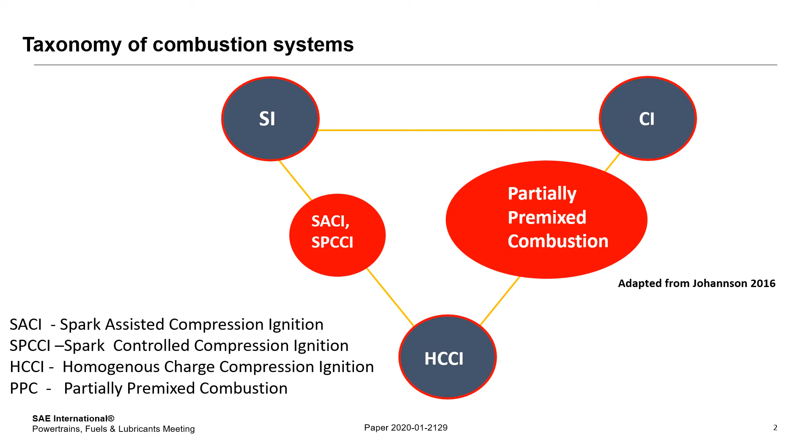If we look at what fuels we might want for partially premixed combustion, there are essentially a number of criteria that we might wish to apply. The first one is obviously whether it'll work in a PPC engine. The second one, which I think is often overlooked, is the availability of that fuel. Because if a fuel is not already available, you end up with a so-called chicken and egg problem, that there might be a reluctance to stock a fuel for which there's no demand, and there might be a reluctance for automotive manufacturers to manufacture vehicles which require a fuel which isn't easily available.

The third criterion is looking at the diesel-gasoline demand ratio in European refineries. Currently, European refineries tend to be long on gasoline and short on diesel. And so anything that encourages the demand for gasoline is deemed to be useful.

So if we evaluate possible fuels for partially premixed combustion against these criteria, first of all, if we look at diesel, yes, it'll certainly work in PPC engines, and it's clearly already available at retail stations, but what it won't do is to rebalance the diesel-gasoline demand ratio. It'll send it in completely the wrong direction.

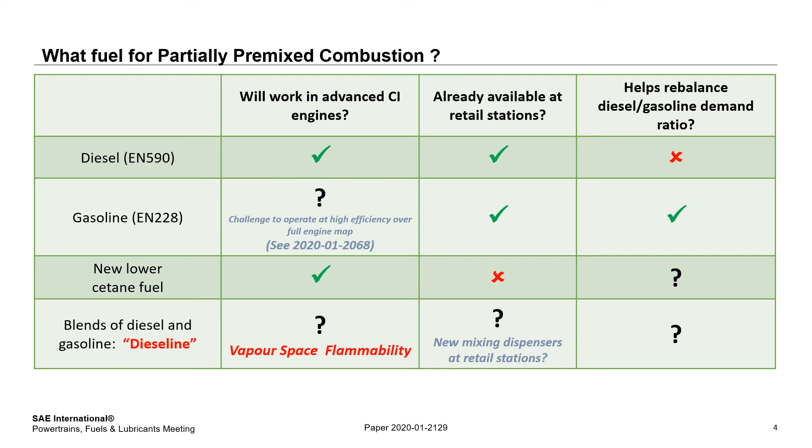Fuel vapor pressure is a function of fuel volatility and ambient temperature. If you look at the extreme examples of diesel and gasoline, diesel, being not very volatile at all, tends to have a headspace that is too lean to burn, whereas by contrast, gasoline, being much more volatile, tends to have a headspace that is too rich to burn.

Now, if you add small amounts of gasoline to diesel, of the order of 1% or less, it's known that that can result in a flammable headspace. And I think many of you will be familiar with the concept of diesel flash point. So adding gasoline to diesel will dramatically reduce the flash point. So really, for a practical gasoline diesel mixture to not be flammable, you generally have to exceed the rich limit. And so that's what we'll be focusing on for the rest of this presentation.

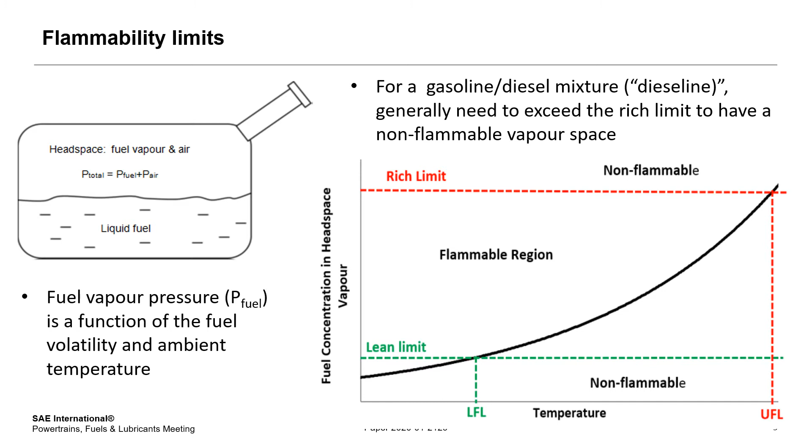So this is the fourth of 4 papers of previous work between Concawe and NEXUM looking at the topic of dieseline flammability. In the first paper, we presented experimental measurements of flammability using a constant volume vessel. We found that under realistic scenarios, if you had around 40% of gasoline in your mixture, you tended to get a mixture for which the headspace was too rich to burn. You'd exceeded the upper flammability limit.

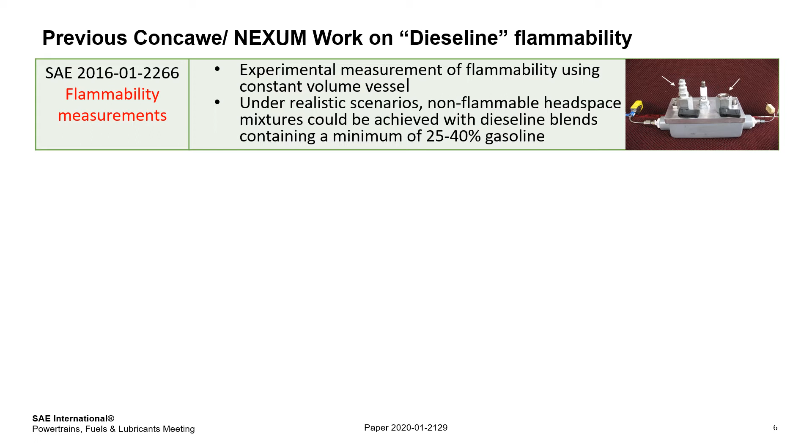In a subsequent paper, we developed a thermodynamic model to predict the rich limit as a function of fuel composition, ambient conditions, and other parameters such as fill level. And we also validated against the experimental data in the previous paper. One thing we found is that because we'd taken literature values for flammability limits, which are based on ideal combustion conditions in a vertical flame tube, our model was actually conservative, and the upper flammability limit temperatures tended to be around 6 degrees higher than the experimental results that we'd seen in our constant volume chamber.

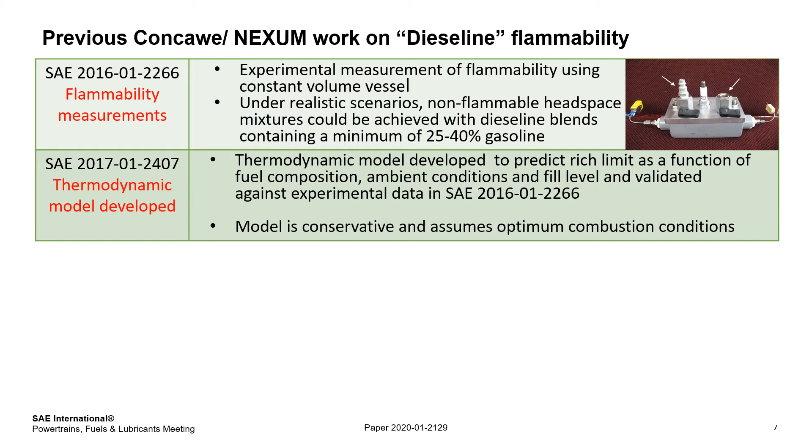In a subsequent piece of work, we applied this thermodynamic model to specific practical situations. And we found that the predicted UFL temperatures tended to be quite well correlated with DVPE, the volatility of the fuel that was in the tank. Now, that's probably not so surprising, but we found that it was particularly clear if you didn't have any alcohol in the dieseline. It was a bit more of a challenge if there was ethanol or other alcohols in the fuels. Obviously, many gasolines themselves are E5s or E10s, so this would frequently be the case. You could correlate the UFL temperatures well with DVPE, but not as well as with just pure hydrocarbon blends.

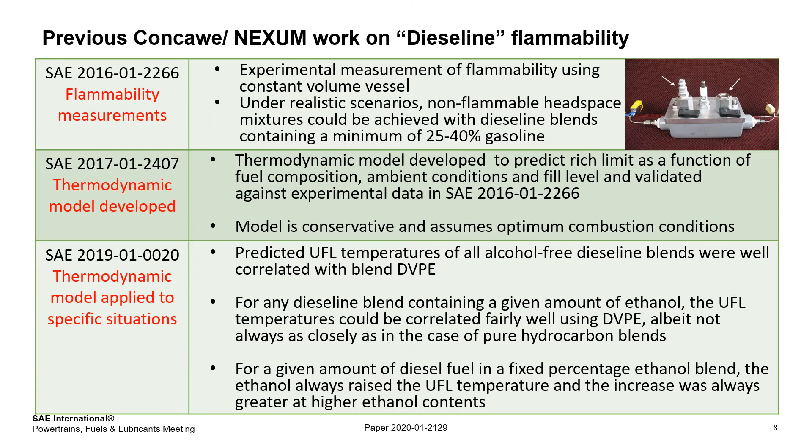And we found that for a fixed percentage of ethanol in the blend, the ethanol always raised the UFL temperature, and the increase was always greater if you had a greater amount of ethanol. So the objective of this work is to utilize the relationship that we found between UFL temperature and DVPE, and produce some explicit formulae so that the UFL temperature can be easily quantified. This paper was really conceived as effectively a user guide for anyone to be able to determine the UFL temperature based on the correlations presented in this work.

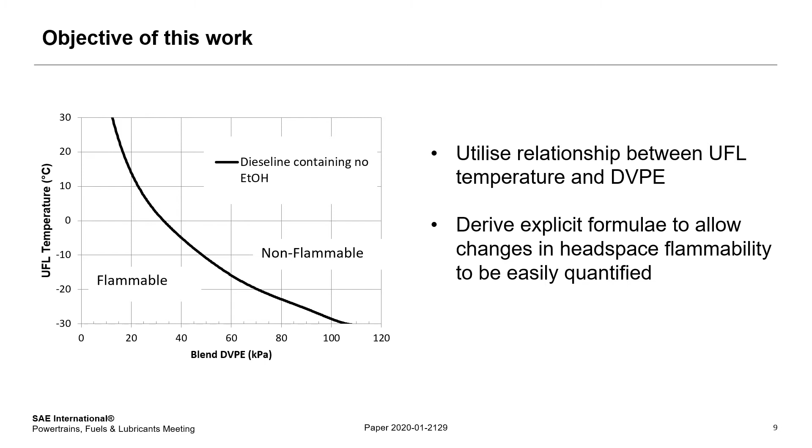Because ethanol really has two effects associated with it. The first is that ethanol tends to raise vapor pressure. This is really well known from fuel blending, the effect of ethanol on gasoline DVPE, and this is why there have often been DVPE waivers given to higher ethanol blends. But also ethanol, because it has a different stoichiometric fuel-air ratio to hydrocarbons, has an intrinsically higher upper flammability limit temperature. Incorporating ethanol into the model was actually the biggest challenge that we faced in developing these explicit formulas.

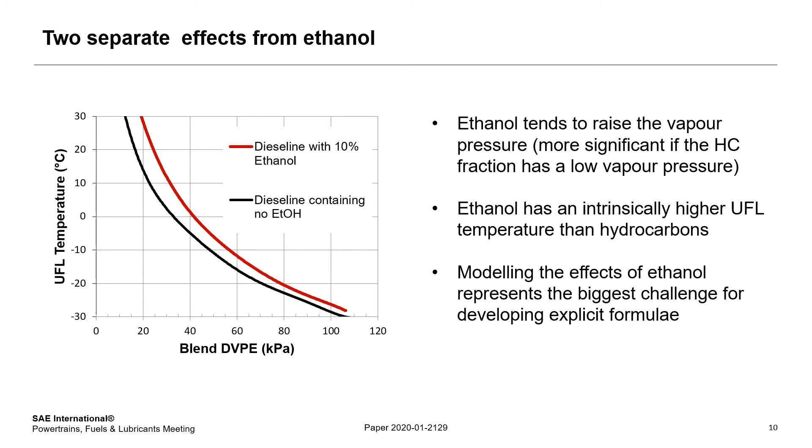And you can see that the impact of ethanol on DVPE can be seen to be most significant at low vapor pressure. And it's obviously less pronounced at the higher vapor pressure.

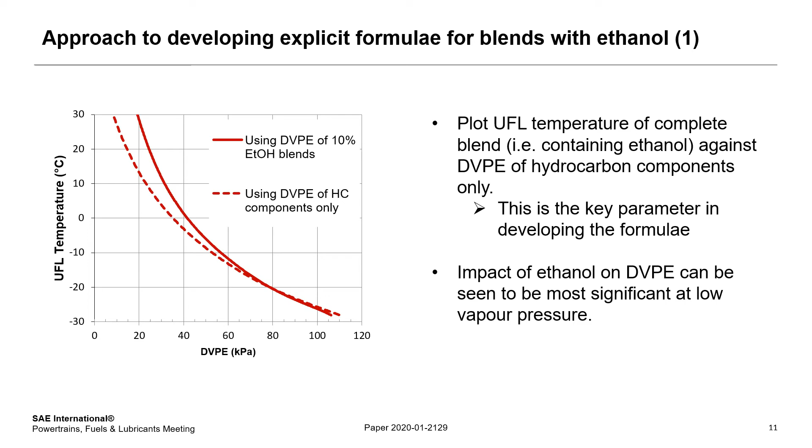So to summarize the approach that we've taken overall, we could have a single curve which can correlate the UFL temperature with DVP for any hydrocarbon-only dieseline blend, regardless of the specific hydrocarbon composition. But we recognize that if you've got ethanol, it can differ considerably from that hydrocarbon-only blend.

So as we showed on the previous slide, if we plot the UFL of the ethanol blend against the DVP of the hydrocarbon-only portion of the blend rather than the DVP itself, then the curves differ from each other. But you get something that is much closer to the curve for hydrocarbon-only blends. And this provides a basis for developing our correlation.

So we actually say that if you're determining the UFL temperature of a dieseline blend with ethanol, you start with looking at the upper flammability limit for the hydrocarbon portion only, and then you develop an adjustment term that depends on the ethanol percentage and the DVPE.

And this can be expressed mathematically as follows, that F1 represents the correlating function of the curve for hydrocarbon-only blends, and the term involving F2 and F3 is that correction factor. Now, F1, F2, and F3 are just determined from a sixth order polynomial, where the arguments for F1, F2, and F3 are the DVP of the hydrocarbon-only fraction, the percentage of ethanol, and again the DVP of the hydrocarbon-only part, respectively.

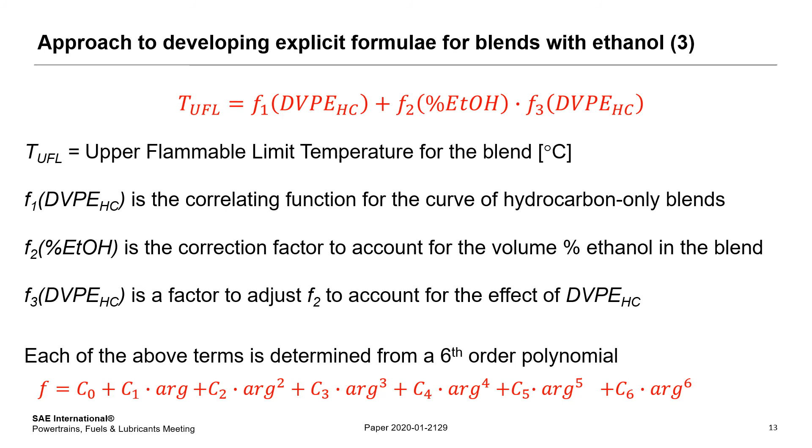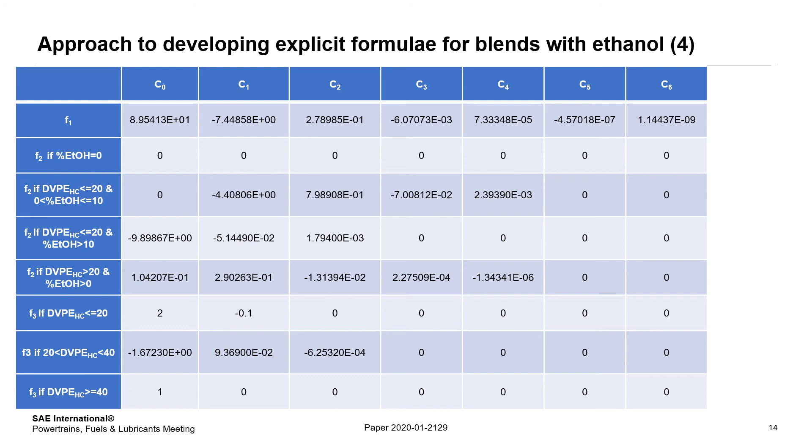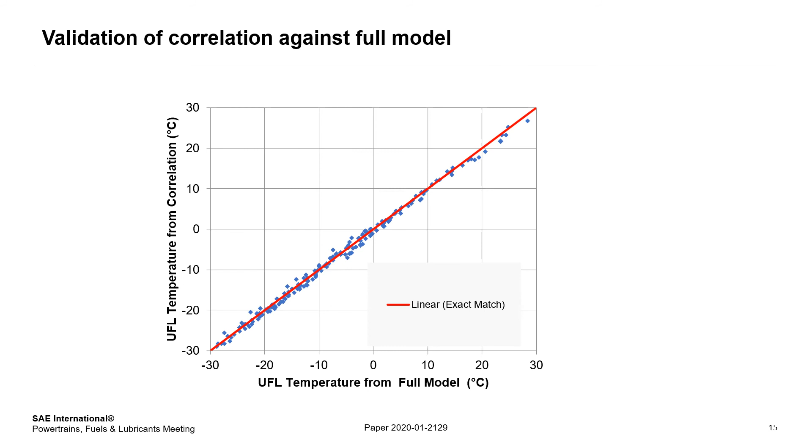And we correlated this model against the full model, the full thermodynamic model. And you can see that really the agreement is quite good.

So, as I mentioned earlier, the purpose of this paper is really just allowing a user who is interested in doing this to be able to determine the upper flammability limit temperature of a blend given a different set of input data. And so the paper gives a number of examples of how to use the correlations given a certain amount of input data. And I'm not going to go through all of the case studies, I think that would be a little bit tedious.

I'm just going to go through the first case study, which is the simplest, where you've just got the DVPE of the hydrocarbon for an ethanol-free blend.

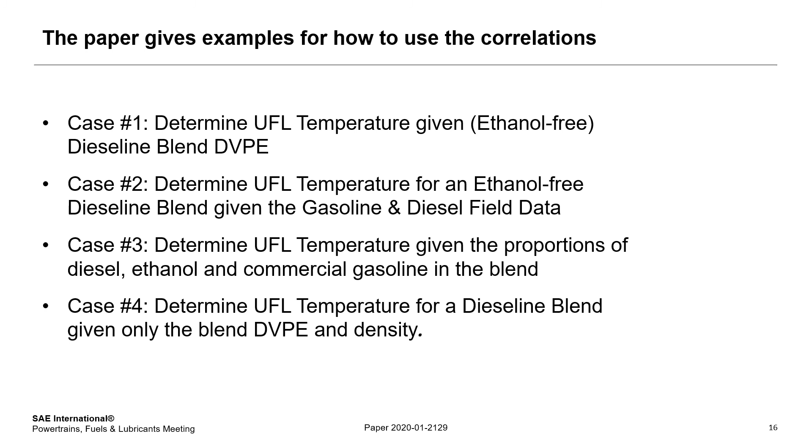So if we measure a DVPE of 44.6 kilopascals for an ethanol-free dieseline, if you look at the coefficients for the formulae, you can see that if ethanol is absent, then F2 is 0, and the UFL temperature becomes simply equal to F1. And if you take the coefficients for F1 and you plug in the argument, which is the DVPE of 44.6 kilopascals, then that allows you to calculate that the UFL temperature of the blend is minus 7.8 degrees C.

So just to summarize this paper, we've developed explicit correlation equations to allow UFL temperatures to be estimated for dieseline blends with or without ethanol. And like the thermodynamic model on which it's based, the predictions are quite conservative in that they're based on flammability limits corresponding to optimum combustion conditions.

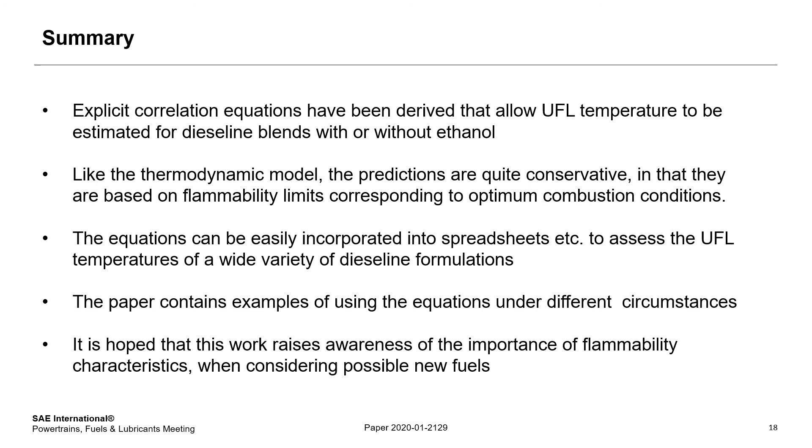The whole point of this was that the equations could be easily incorporated into models and spreadsheets to assess the UFL temperatures of a wide variety of dieseline formulations. So the idea is that they're effectively user-friendly, and the paper contains examples of using the equations under different circumstances and conditions. And I think more generally, a conclusion for the whole program is that it's important to raise the awareness of the issue of flammability characteristics when considering possible new fuels.